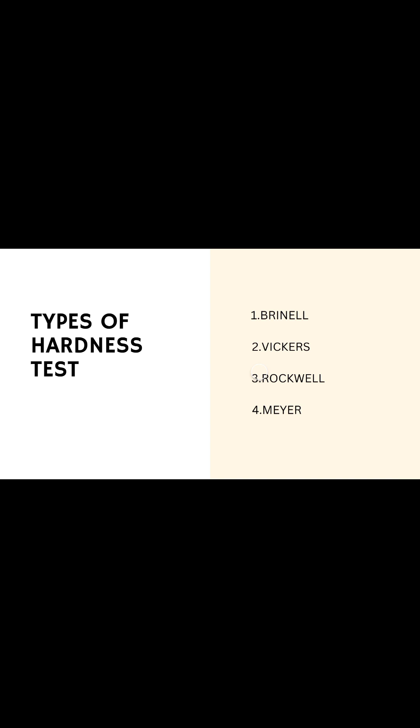Types of hardness test: there are 4 types, which are Brinell hardness test, Vickers hardness test, Rockwell hardness test and Meyer hardness test. Today we are going to see about 2 important hardness tests.

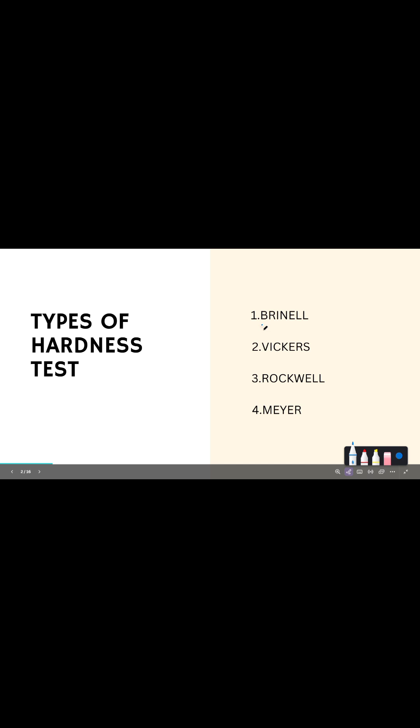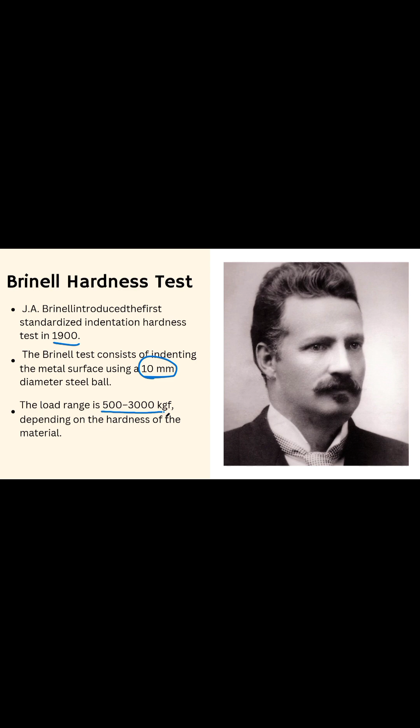The first one is Brinell hardness test. It was introduced by J. A. Brinell in the year 1900. The indentor used in the Brinell hardness test is hardened steel or tungsten carbide ball, and the diameter of the ball is 10 mm, and the load range is from 500 to 3000 kgf. The load range is given depending on the hardness of the material.

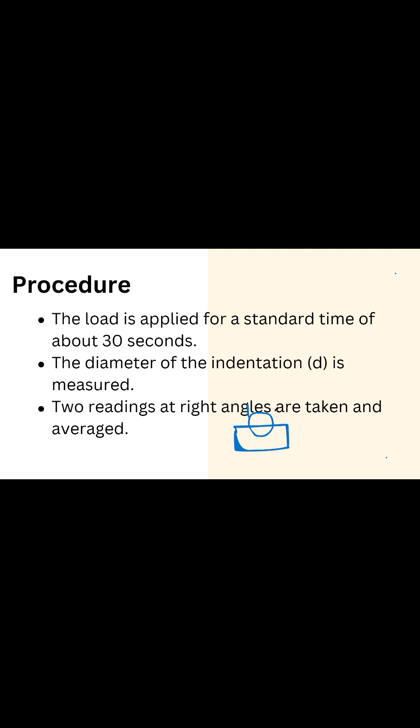The load is applied for 30 seconds. Let us consider this as metal, this is the indentor, and this is the impression created by the indentor in the metal. This is capital D, which is the diameter of the indentor, and this is small d, which is the diameter of the indentation.

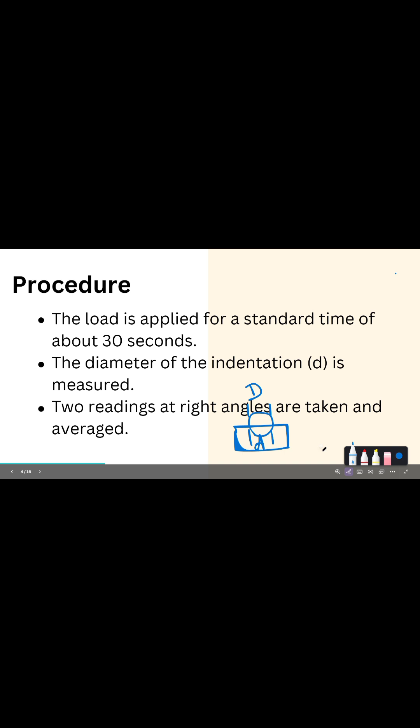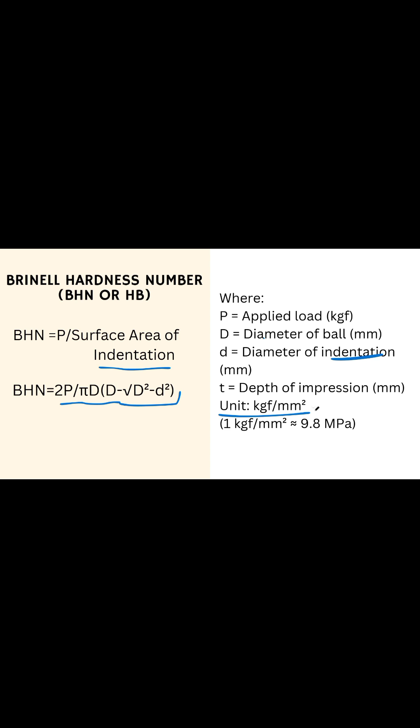Brinell hardness number: the formula used to calculate Brinell hardness number is P by surface area of indentation, which is equal to 2P divided by pi into capital D minus square root of D square minus small d square. P is the applied load, D is the diameter of the indentor, and small d is the diameter of indentation, which is the impression created by the indentor. T is the depth of indentation. The unit for Brinell hardness number is kgf per millimeter square, which is approximately equal to 9.8 MPa.

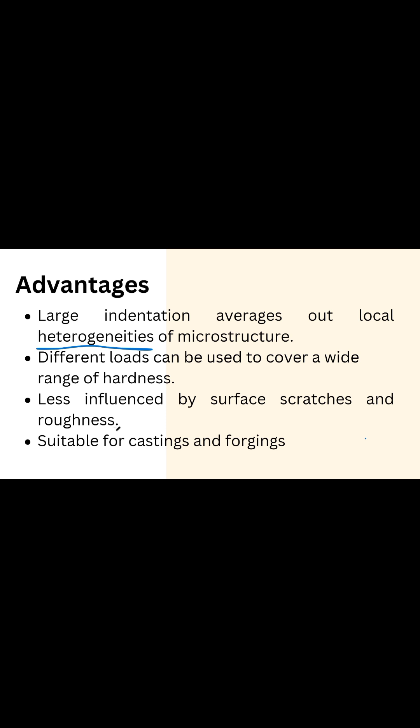Advantages of Brinell hardness test: large indentation averages out local heterogeneities of microstructure. Heterogeneities means non-uniformities or irregularities. It averages out irregularities of a microstructure. Brinell hardness test can be used to cover a wide range of hardness, and it is less influenced by surface scratches and roughness. It is suitable for casting and forgings, which means shaping of metals.

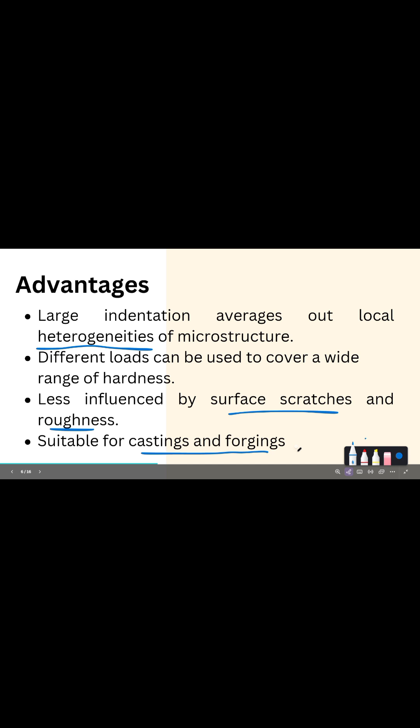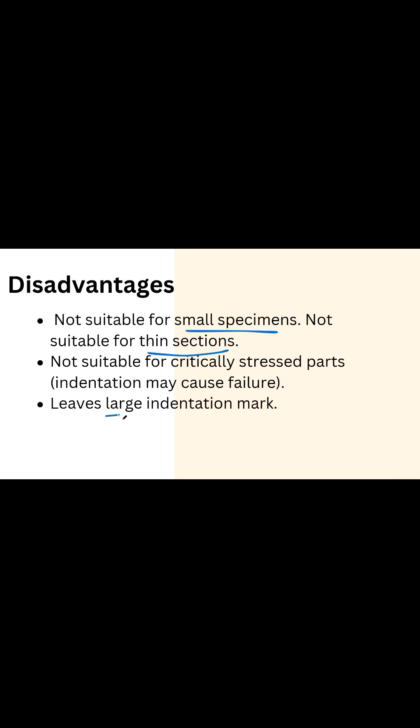Disadvantages: it is not suitable for smaller specimens. It is only suitable for bulk materials, and it is not suitable for thin sections. It is also not suitable for critically stressed parts, as it may cause failure. This indentor leaves a very large indentation mark in the metal. So these are the disadvantages of Brinell hardness test.

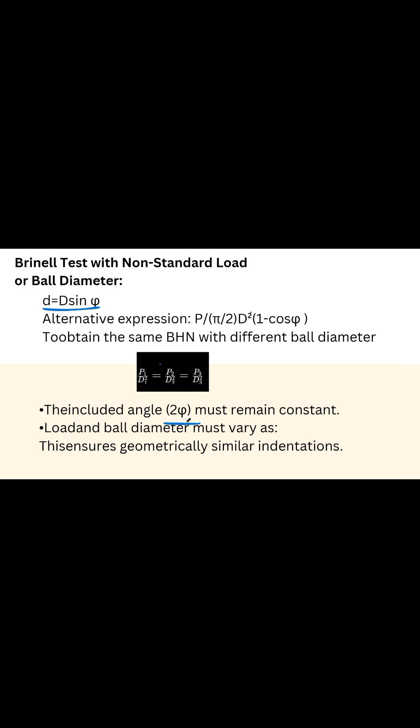Next is Brinell test with non-standard load or ball diameter. Let us consider small d is equal to capital D sin phi. The alternative expression for this is P divided by pi by 2 into capital D square times 1 minus cos phi, where capital D is the diameter of the indentor. The included angle must remain constant, and the load and diameter must vary as: P1 by D1 square is equal to P2 by D2 square is equal to P3 by D3 square, where P is the applied load and D is the diameter of indentor.

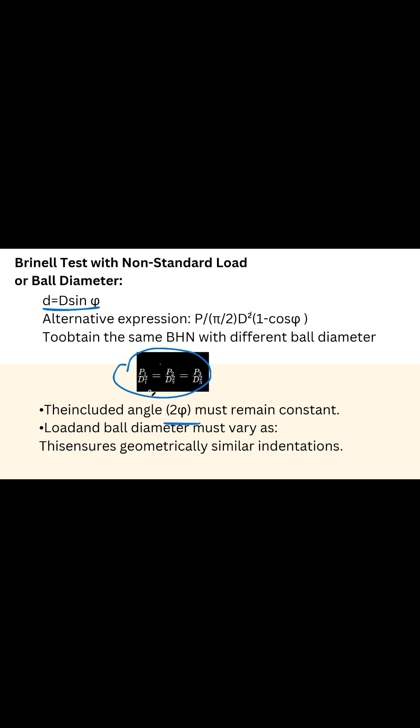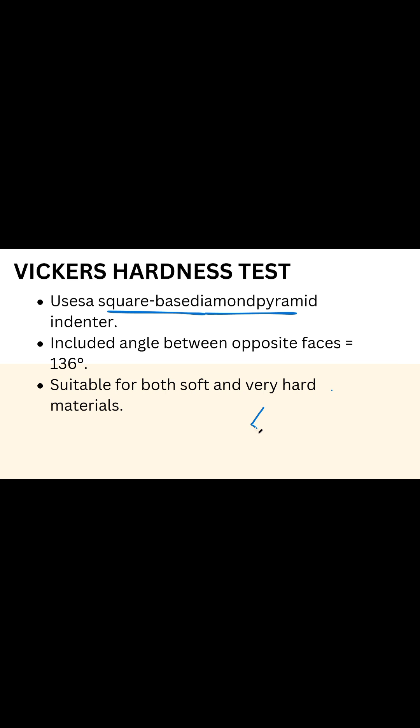Next is Vickers hardness test. Vickers hardness test uses a square base diamond pyramid indentor, which looks like this, and it is also suitable for both soft and hard materials.

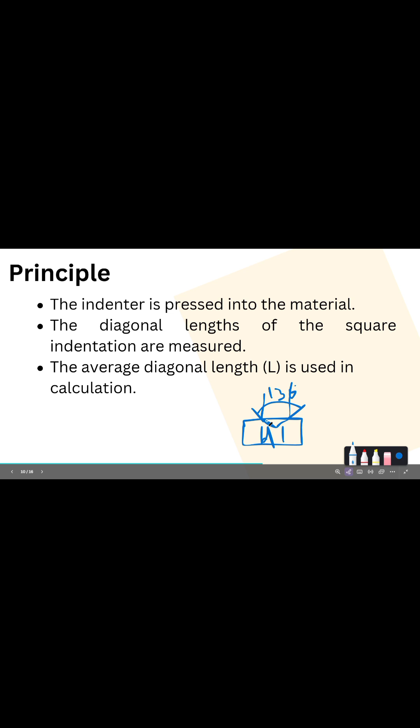Principle: the indentor is pressed into the material and the diagonal length of the indentation is measured. Let us consider this is metal, this is the indentor, and the angle is 136 degrees. This is small d, which is the diameter of indentor. This is the impression created by the indentor.

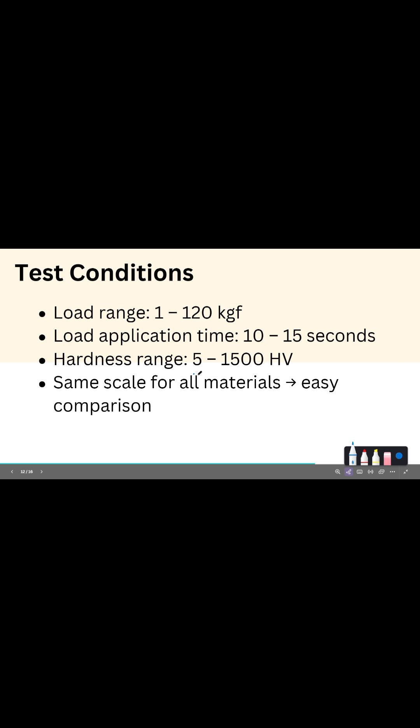Conditions for Vickers hardness test: the load range must be 1 to 120 kgf, and the load is applied for 10 to 15 seconds on the metal, and the hardness range is from 5 to 1500. In Vickers hardness, the same scale is used for all metals.

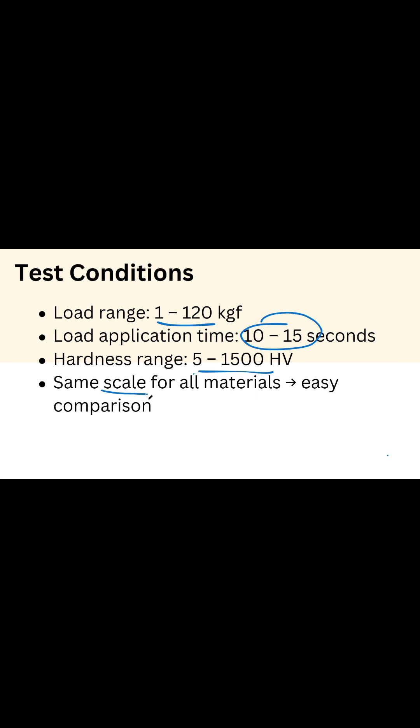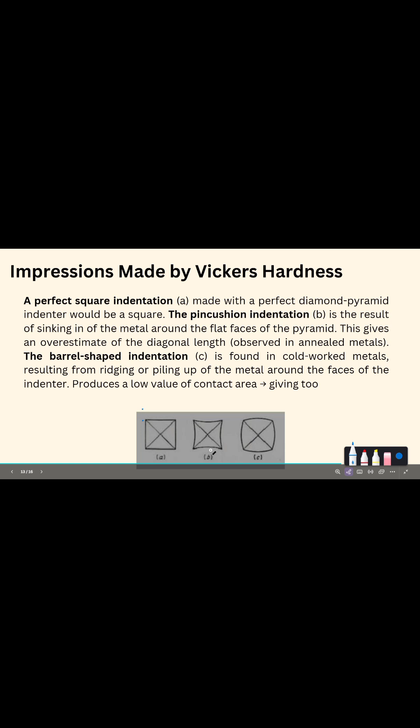The next one is pincushion indentation. It results in sinking of metal around the flat faces, like this. The third one is barrel shaped indentation, which is found in cold worked metals, and it results in ridging or piling of metal around the faces of the indenter, like this. These are the impressions made by Vickers hardness.

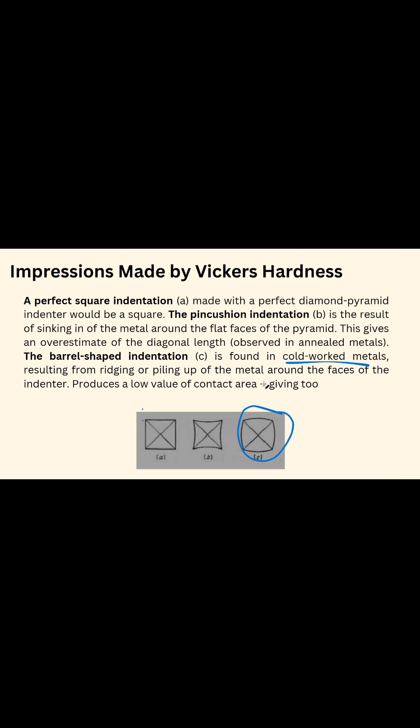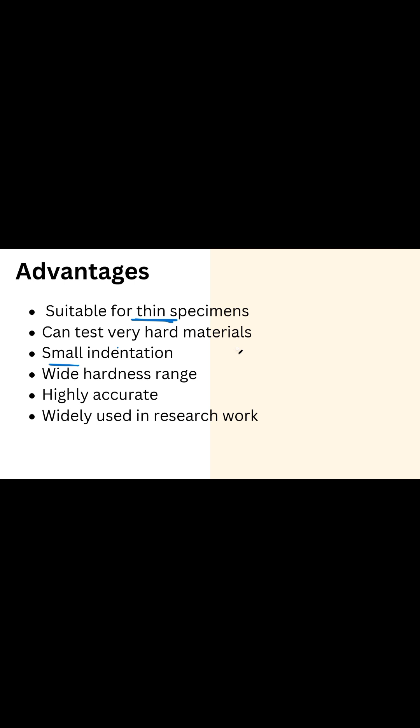Advantages: it is suitable for thin specimens and can test very hard metals, has small indentation and wide range hardness, is highly accurate and used in research work. Disadvantages are it requires good surface preparation, it is a slower process, it is not widely used for routine checks, and the equipment for Vickers hardness costs higher.